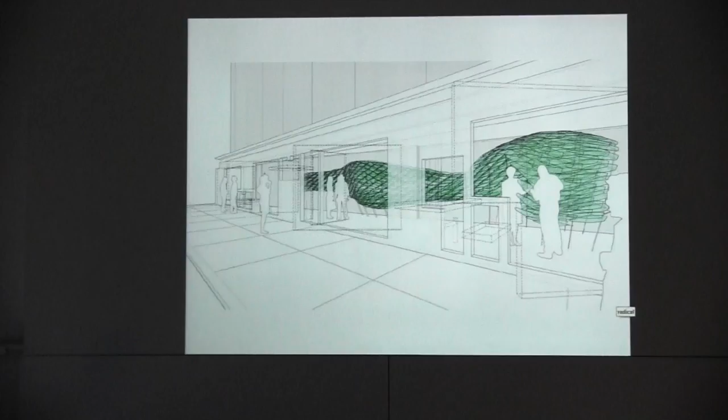Just to talk a little bit about what my office normally does, there's a very contemporary interest in just trying to figure out what technology means for form, through installations, through public art projects, and then through much larger projects at the scale of landscape or regional infrastructure. And maybe to jump into a quick project, this one was not the first project that I worked on dealing with ceramics, but I think one that was meant to be the most responsive to architecture. So I'd like to start off with that one first.

My office is located in downtown Los Angeles, and there's an incredible tradition of turn of the century glazed terracotta tile buildings all over town. Mitch had mentioned that one of the main former competitors around the turn of the century with Boston Valley Terracotta was located in Sacramento, California. That is Gladding McBean. Most of these would be Gladding McBean projects, where they basically produced all of these tiles. First of all, I was interested in trying to figure out this technique, which is press molding, which I assume is also what the majority of Boston Valley Terracotta was engaged in the past. I know that's not necessarily the case anymore. But a lot of these terracotta tile facades were done through press molding.

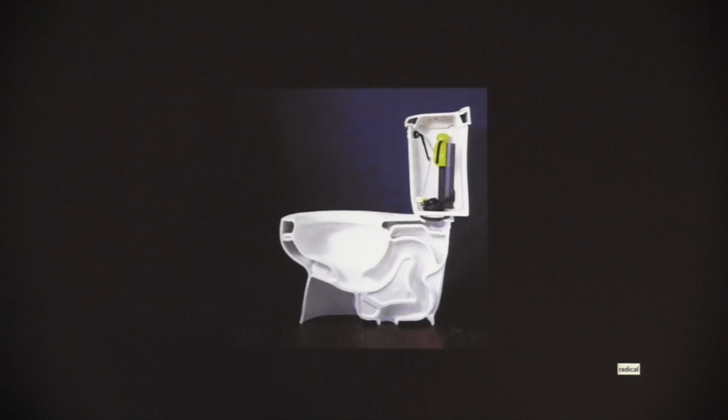This project was mostly interested in taking a look at that terracotta tile facade, which was mostly done through press molding, which we could call something which is about 2.5 dimensions. It's not quite three-dimensional, it's a deformed surface. What would happen if we produced that through a different technique, which would be slip casting, which produces closed volumes, more or less? And then what could emerge out of that? And I think we know that slip casting, which is the way toilets are still more or less produced, that number one, they operate as rather complex vessels.

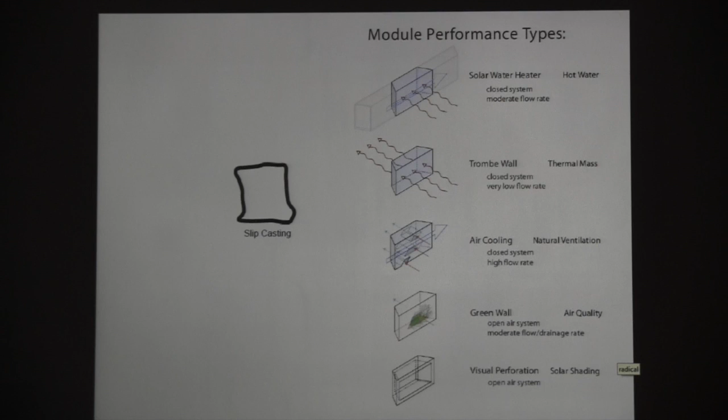So what would that offer as a facade that could be produced out of a series of complex vessels instead of a series of essentially deformed surfaces? How does that move it away from being purely ornamental into something that's ornamental and performative simultaneously? And so this is a kind of host of different types of performances that we could potentially expect out of something that is volumetric and modular.

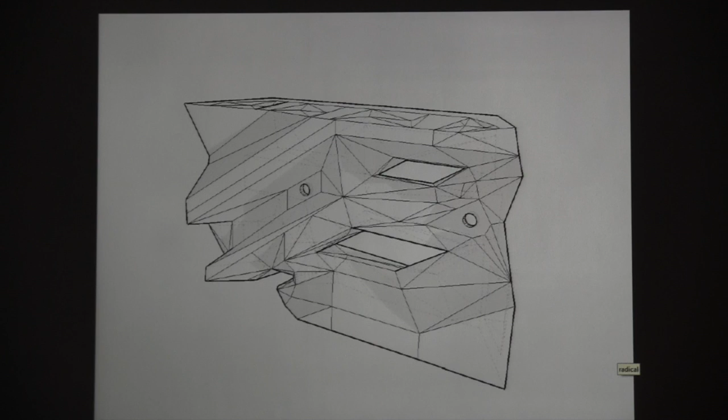And then these are the two here, the passive air cooling system and the green wall system that we then prototyped. And this module was largely designed basically about the flow of fluid between this module and neighboring modules, and then some overall pattern that would hopefully dissipate or remove the kind of browbeating logic of one module over and over and over again. I think that's also a contemporary concern with facade systems in general right now.

I think we decided to basically pick a method which was not incredibly complex geometrically, so corbelling, something which deals with courses rather than complex tiling, which would be where you're trying to produce complex curvature over tiles that fit snugly one against the other. We opted out of that and instead chose an older technique, it's like slicing things into two-dimensional profiles. If you can get one course of these modules to run along a curve, you can just stack those curves.

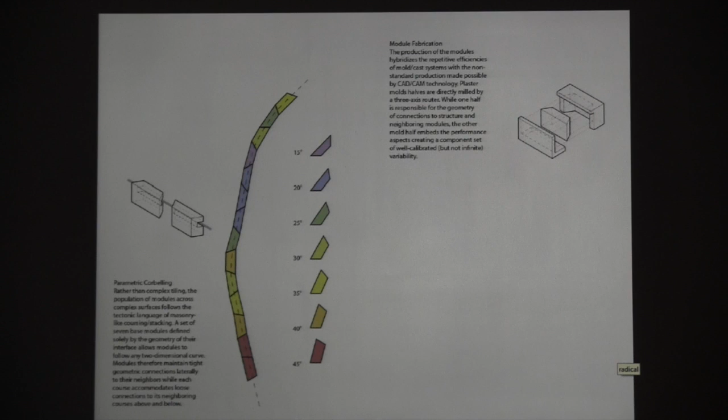And then maybe what was a little bit more innovative about this was to say we could have variable molds where we rotated out different mold halves. One half of which would be responsible for geometry, how it interfaces with its neighbor, and the other half which would be responsible for performance, what it does, whether it's passive cooling or something else.

And then again, that overall aesthetic of trying to eliminate the logic of just one module repeated, but actually being more concerned with how the population of different performances of any one of these modules would start to develop an aesthetic for the overall project. So here, a set of different types of performance, let's say for gray water filtration. I think Brian mentioned the project, which I know through Potters for Peace, which is about purifying water.

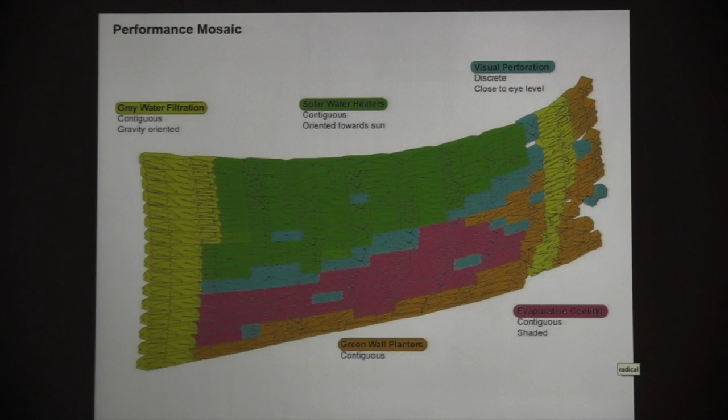That would need to be continuous vertically if it were going to be run through gravity, whereas there's some others which would not necessarily need to be contiguous. Some which would want to be located closer to the top of this kind of belly so that they'd be facing the sun, some closer to the bottom if they were looking at passive cooling. And then what any of those would start to imply for aesthetics, for the luster, basically whether or not it's glazed, whether or not it's reflective.

Any of the ones closer to the top, which are more about passive heating systems, are asking to absorb more sunlight. Those darker ones in the middle are actually non-glazed because they're meant to be left porous, since those are about porosity allowing water to filter through them. And then how color might also align with that. Some which are just the natural color of the clay body, and others which could be glazed darker to actually absorb more sunlight.

And then producing a limited run of prototypes to just test how these things would aggregate without dealing with anything like connections at this point, which would be a serious issue, but maybe anticipating them. So you can see that these all have bolt holes, and they're ready to be attached. Structure is anticipated inside of here, but this is not a structural system on its own as a ceramic system. We just admit that maybe what we're more interested in is creating a hybrid system with something like steel or aluminum profiles which deal with structure. And then the ceramic modules are left free to do something else outside of structure.

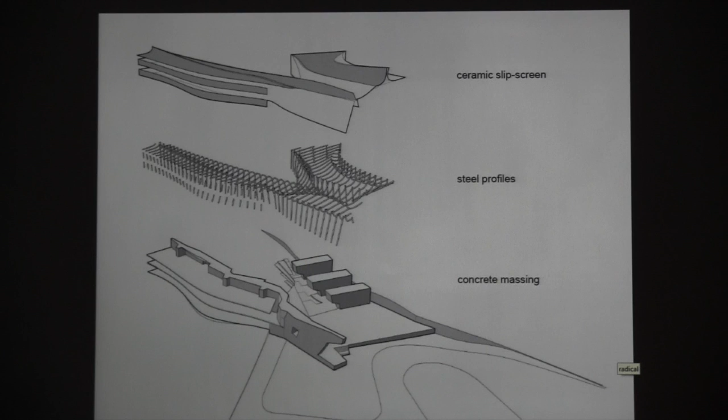And then basically saying, again, we've got this system of steel profiles, and the ceramic screen then gets to drape over the architecture, operating almost purely as a modulator of the environment. And it's barely there. It's a relatively thin profile, so you can barely see the envelope of the entire building, but maybe similar to some of the examples that Miguel showed, there's definitely a loose fit in terms of the program spaces versus the envelope.

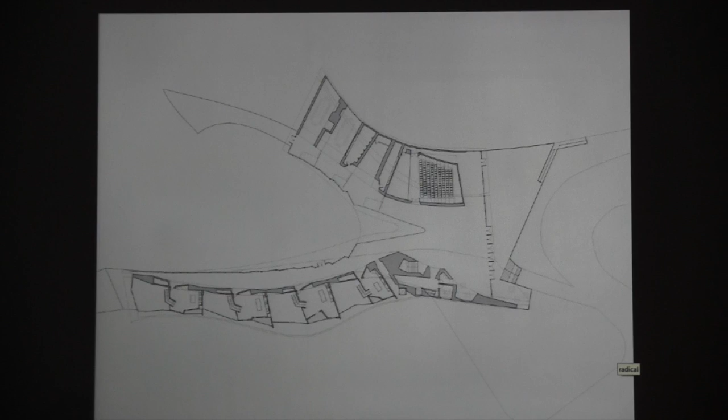And then also just thinking about the ways that both the ceramic modules and larger systems would work through the architecture, I think, was important at every step. So you can kind of see basically the passive cooling system versus something that's more about solar heat gain, depending on the time of the year, of course. So kind of a limited set of tests about aesthetics, but I think it was

more about how could we produce a larger architecture given all of these, I'm going to say advances, but it's maybe more like rediscoveries in terms of the way that ceramics can be used right now. And so I'm going to categorize that as almost updating the traditional. It's not entirely true, but then I'm going to contrast that a little bit against some other issues. But maybe in terms of updating the traditional, this is what we understand to be important inside of ceramics, ceramics performance.

And these are some of the issues that Omar listed right from the get-go in terms of what the conference is trying to tackle. Issues of availability, porosity, sustainability, all of these things that we know are inherent in the material that I think are important for us to deal with and explore regularly. And then there is another way that I think is also worth exploring, which I'm going to call testing the technological, or maybe almost more like teasing the technological.

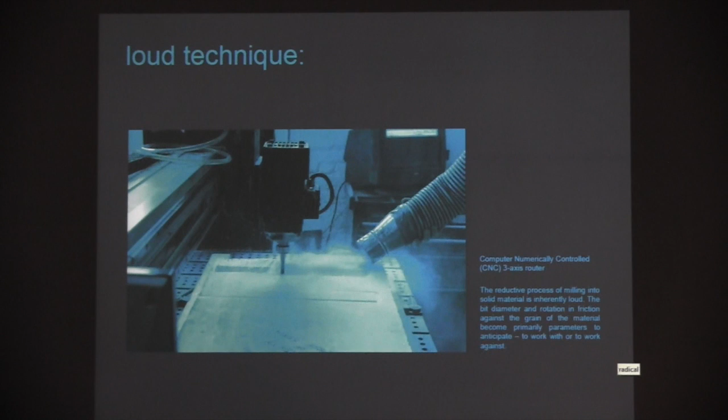And I think this desire came from me, quote unquote, growing up in a digital education. So all of my studies were paperless. There was no such thing as an interest in materiality. That was simply a function of the era in which I went to school. And I think I understood that as I came out of that, the most important thing to do was to test that against its evil twin, let's say. So I was looking for materials that would resist in the most dogged way possible. So that's what drew me to ceramics.

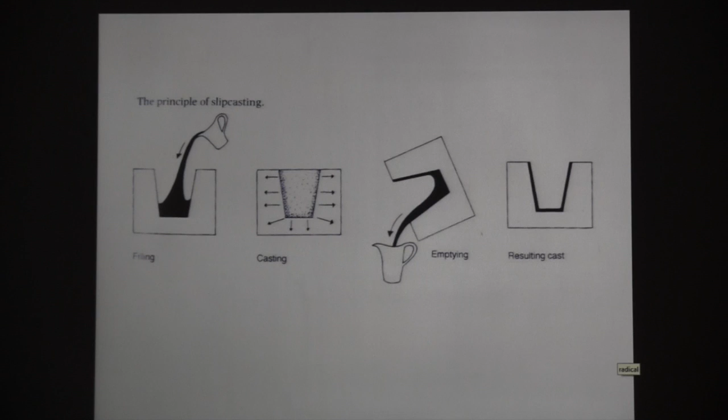So potentially everybody here already knows the process of slip casting, but essentially you pour liquid clay or slip into a plaster mold, which wicks away the water. It leaves a thick buildup. You pour out the excess, and then you let that thick buildup sit. It hardens. You fire it like anything else, and you have a pot. I love that it has this association with almost like trinkets. So my grandmother actually had a kiln and would produce pieces like this, right? Or let's say with this as the goal, maybe not of this quality.

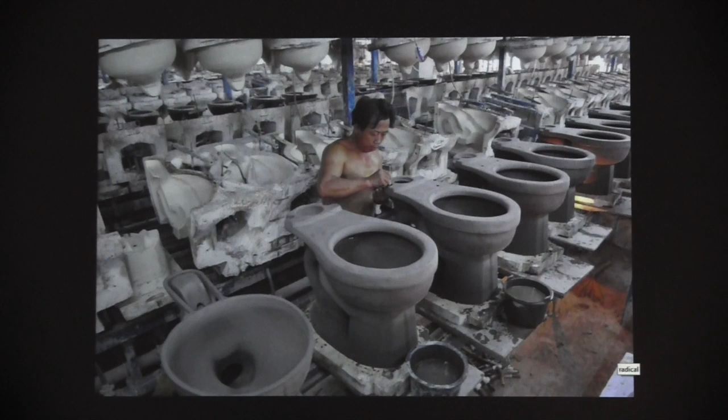And so the persistence of tradition, of this democratic availability of material, I think is important for us to reconcile with. And I would say this is something that, as architects, we somehow go through phases of ignoring. We're coming out of a phase that was ignoring that for a while. Even this persistence of tradition, that a lot of industries are still producing essentially huge quantities of products, of commodities, through a system that is more than 100, 200, 300 years old.

So the kind of anachronism, I think, is important, but there's still something valuable, actually, about anachronism. So, basically, to go back to that project of just producing this thing out of ceramics, obviously, once you get that thing out of the mold and get it out of the kiln, you have it as a fired object, it takes on a preciousness that it never had before. It takes on a seriousness as form that it never had before.

And then for me, I was also really interested in what I could discover out of that artifact that I wouldn't have anticipated had it not been produced out of ceramics. And to almost understand that again as an architect. So to just produce documentation of it through architectural techniques. And then maybe to flip to the other side and say, what happens if we just looked at it in terms of dishware techniques, ceramic traditions of dishware.

As soon as it gets decaled, it automatically locks it back into its own scale. And so then it kind of begs to be inhabited at that scale. And somehow, I don't know why, but packaging and Japanese food go together really well.

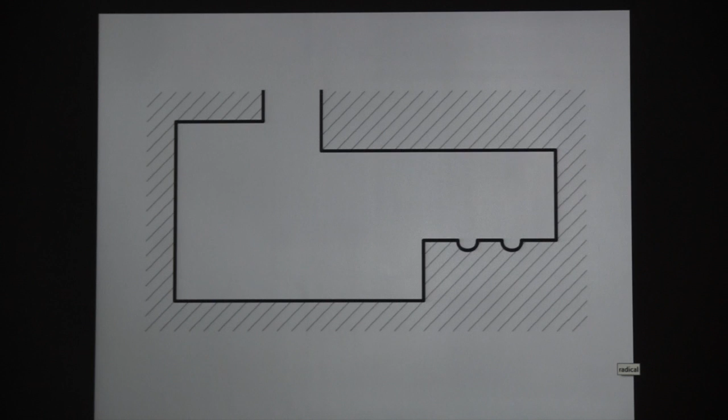So we're at a moment where we're finally coming out of that, and I think it's very exciting, which is also why we're interested in ceramics right now. The limitations of geometry over materiality, that somehow materiality still has its weight. This is a cross-section of the plaster mold, and however much you can dictate that interface zone between the clay and the plaster, there's always this interior that is produced more through issues of viscosity, surface tension, and less through geometry as dictated by me, the designer.

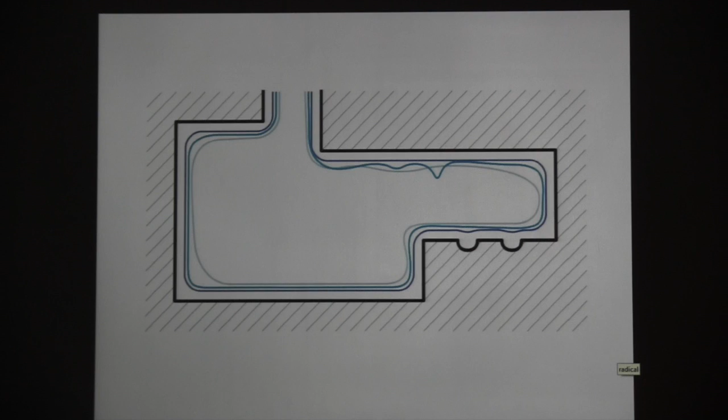And then also the complexity of all of these different mold parts that are required to produce the human form. So at certain points, that's maybe 10 or 12 mold parts that you would need because of all these different undercuts. But at other points, it could get up to somewhere in the range of 200, 300 different mold parts. And to view that maybe as something that's not a problem, but again, it's a provocation from the process to us as architects, which segues directly into one of the questions from the earlier panel discussion. What does this mean when we move to larger scales as architects? And I think this issue of upscaling is incredibly important.

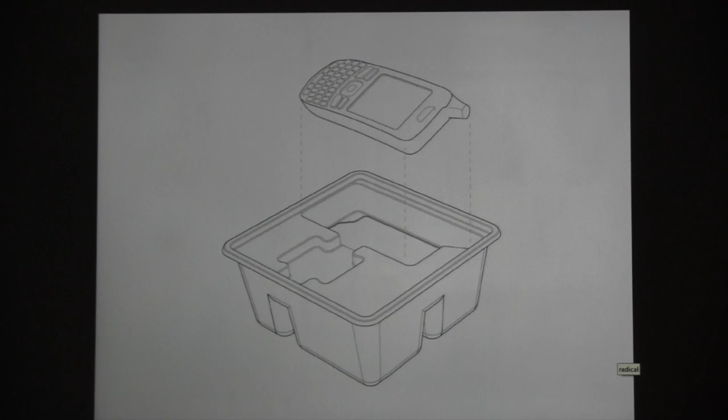So that was the next phase of this project, to just take that on. What would it take to produce that exact same thing at twice the scale? Number one, it required slicing it up into 8 slices. And then producing these different slice molds, which were 2 parts each, so it produces a 16-part mold, which already is getting pretty complex. But then I decided once I had these 16 parts that I would like to have them be repositionable. So there's 16 parts which can shuffle, which means that the precision level has to go up almost infinitely.

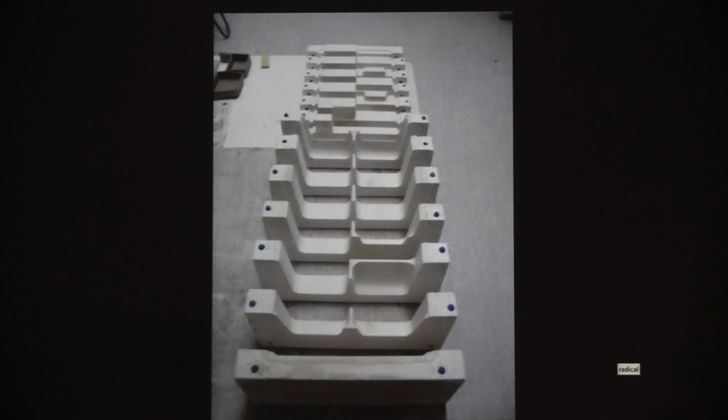This, by the way, was also done at the European Ceramic Work Center. You'll probably hear that come up as one of the hubs of advancement around the world right now. So there's that one in Den Bosch. There's Buffalo growing.

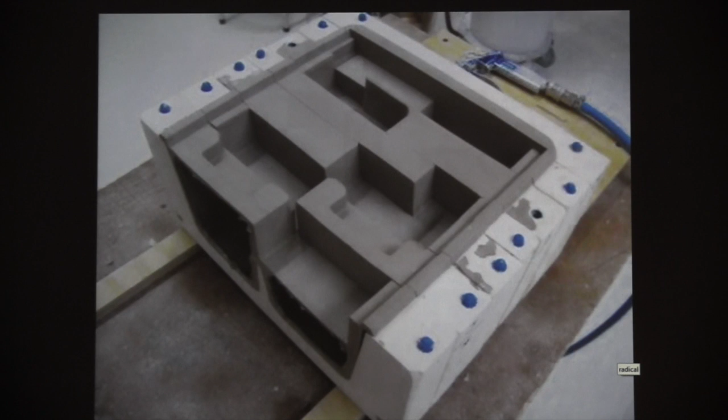But I think, what happens then when the technique starts to offer the possibility of not just reproduction of form, but actually form generation? It produces new forms that didn't exist before and probably wouldn't have been conceived of by me from the get-go. So it produces families of forms rather than just forms.

And then something that's particularly interesting for me is the way that this starts to look more like architecture, simply because it's just been doubled once. It went from about this big to about this big, but it starts to have all of these other issues there, like seam lines, ledges, all these things that get closer to architecture.

I'm gonna stop. Yeah. Okay. Thanks, guys.

So my presentation is based around the Kachel unit. It's called the Kachel unit, but I'll show how this very specific thing actually relates to a lot of these more general ideas that have been coming up in many presentations. The Kachel sounds like a really obscure thing, but I'm going to leave it as a German term because there really is no proper English translation.

The Kachel is part of the Kachelofen, and the Kachel is a kind of 3-dimensional ceramic tile unit that's used in the Kachelofen, which is a ceramic tile heater. In German there's a differentiation between Kachel and tile, which is Fliese, so I won't call it a tile. The 3-dimensionality is really critical to it, and I think it's one of the main things that drew me to explore this with some students here at UB in a seminar last semester, which I'll show at the end.

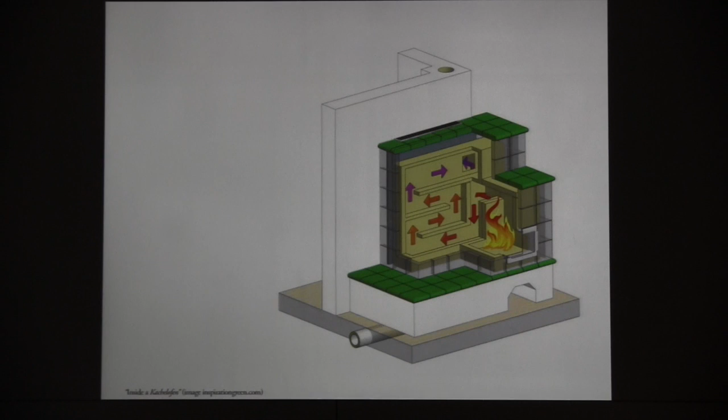So again, here's another example of just how simultaneously simple and elaborate this system is. Basically, smoke tumbles, but eventually it wants to go up. It is drawn out of buildings, wants to go up, and it's drawn out by cold air as well.

There are calculations to know really how long that flue can be before the chimney draw loses its power and the exhaust is no longer forced through. Of course, it's not a good idea to have a flue run that's so long that the smoke becomes stagnant and puffs back into the room. But that's the general principle. It's very simple.

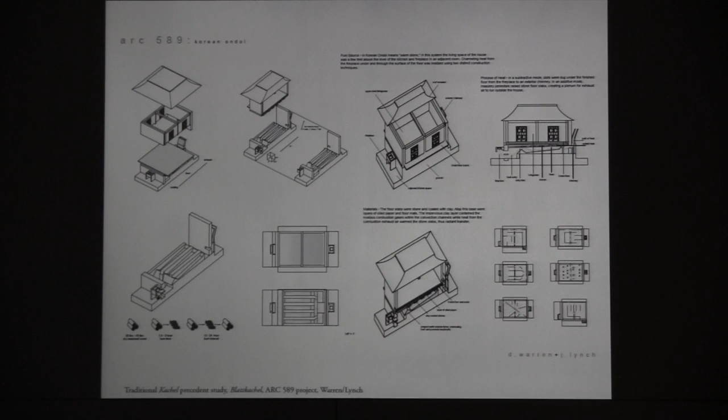And in the studies that I'll show you at the end of the presentation, this is just an example of how the students started. They looked at various precedents just to see how the system played out historically in space. So what is the impact, or what is the potential impact, or what has the impact been historically of this type of heating system on space?

With the Korean ondol, very similar to the Roman hypocaust system, there was a floor buildup with this flue run, and the floor was heated. So we think of radiant floor today as this fantastic luxury. It's actually been used in very low-tech, more primitive ways for centuries.

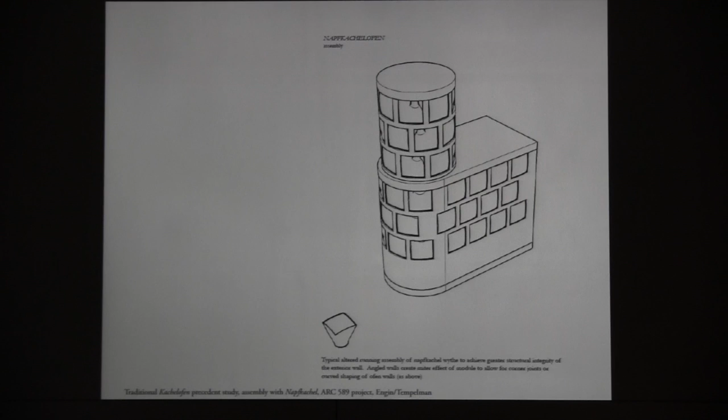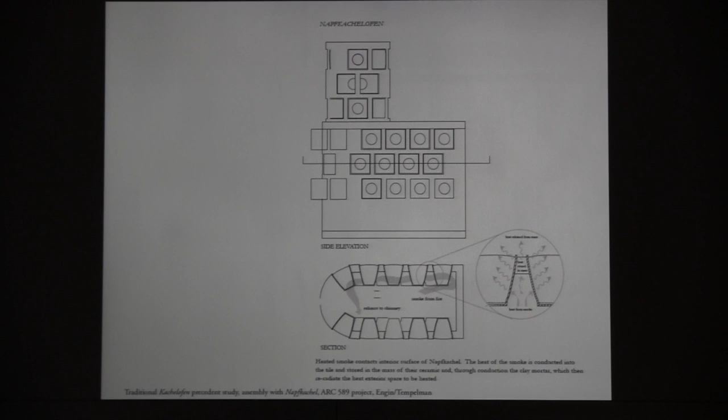So the students looked for a logic behind some of these old Kachel forms, and looked at how they figured and played a part and performed in these heating systems, how the exhaust smoke related to them, how they mediated heat. Again, more examples showing also how they were traditionally made. So again, there was a critical moment where this volume turned flat and any kind of relief became more decorative than functional.

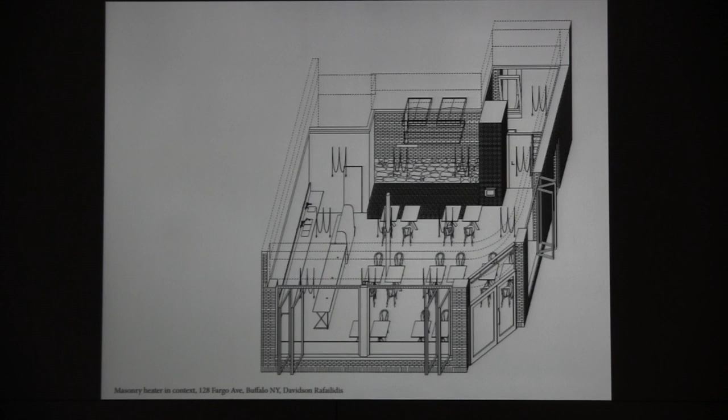Really simply articulated through a really long loop. So the firebox is here, it's insulated off of the floor so that all of the heat is forced up and out. And the smoke is drawn up through a chimney here, but first of all, there's a hole in the side of the firebox, so it's drawn through this entire bench and up. That bench is clad with a kind of refractory clay panel, precast, and that is a kind of material that becomes fired over time as this unit is actually used.

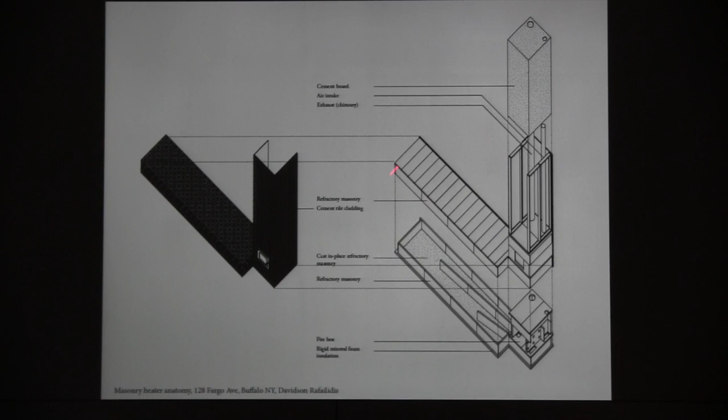And then on top of that, there's cement board just boxing in the chimney basically, and this entire bench is the sort of performative radiator really of that system. So these images show the guts or the interior of this system. You can see these boards in relation to the firebox, the construction process, how it was built up. The cladding in this case is very disappointing because it's not relating to the fundamental system. It's a cladding just like a ceramic cladding is also in contemporary Kachelofen, although this one is so big it was too expensive to use ceramic tile.

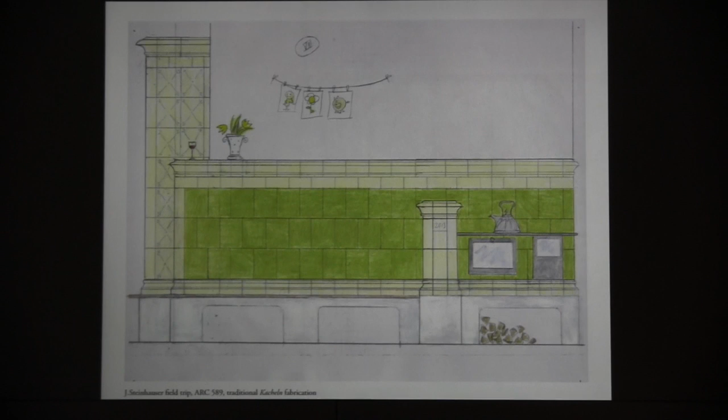So again, I mentioned Kachelofen that are made currently here in Guelph, Ontario. This one was trained in Austria and showed the students directly how these are built; it's kind of like a religion. There's a very strict orthodoxy in how these are built, the whole Kachelofen system. And the interior is completely the purview of an engineer. So that's interesting too, that they're two different systems divided by two different experts. The Kachelofen system is something that can be taken apart because it uses clay mortar, which is soluble.

The craftswoman Jessica Steinhauser gave a demo of how this little assembly could be taken apart and then put together again. Just like Joshua was describing, she uses press molding. You can see here the mold. She actually doesn't make them herself. She buys them, and they're very flat. She rolls out the clay, very traditional technique. This is really how they've been doing it for centuries, except for the extrusion machine. These were, of course, made manually before.

These are the fins that make this otherwise very flat tile three-dimensional. So these fins are critical in differentiating a tile, a Fliese, from a Kachel, because within these tile volumes, mortar or clay mortar can be packed to contribute to a higher thermal mass and adhere to the actual functional system within.

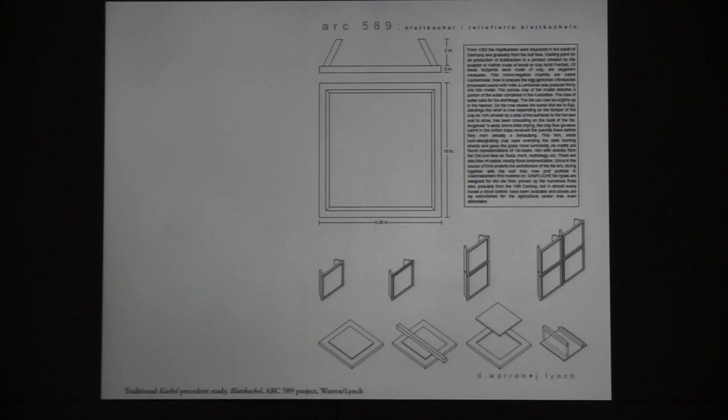They studied the Blattkachel and it really informed their design heavily. They looked at Jessica's method, and they developed a fabric formwork. In this case, it's really interesting because they didn't start with clay. They started directly in making a mold. So they made this frame and used fabric formwork, which under tension bulged in a way that they sort of pre-imagined, and ended up with variations of the bulge.

This was an interesting mold because unlike many molds, it was a mold where the pieces could be swapped out because of this mitered corner. Typically, for anyone who's worked with molds, you know that they have registration marks, and the relationship of a mold's various parts is really specific to that mold. But in this case, these were not. The mitered corner, of course, is really not stable in terms of how that mold locks together. It doesn't lock. So you can see they had a really elaborate strapping system because the weight of the slip was also very heavy.

So here's an example of a module, a 3-dimensional module made with just one bulge, the interior of the mold. This is made with pottery plaster, very simple. The slip being poured in, it was too heavy to pour out. Here you can see, it's so enjoyable to see the students start to really observe the physics of the project, and that moment where the skin is forming in slip casting and peeling away from the plaster, although it's filled with liquid slip. So as I mentioned, it was too heavy to pour out.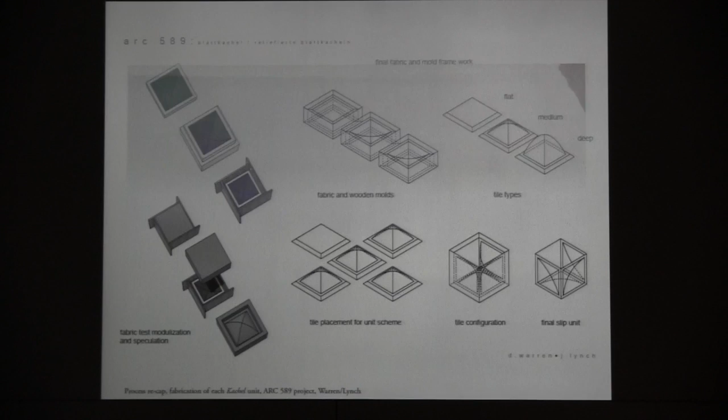The entire skin inside collapsed when they tried to pour it out, so they actually had to scoop it out with bigger bowls and then smaller bowls. So there it is hollow, releasing it from the mold, and here's a piece of greenware not yet fired of just one of the modules, views from various sides. I'll just flick through it very quickly. So these were first attempts, so they're full of questions and challenges.

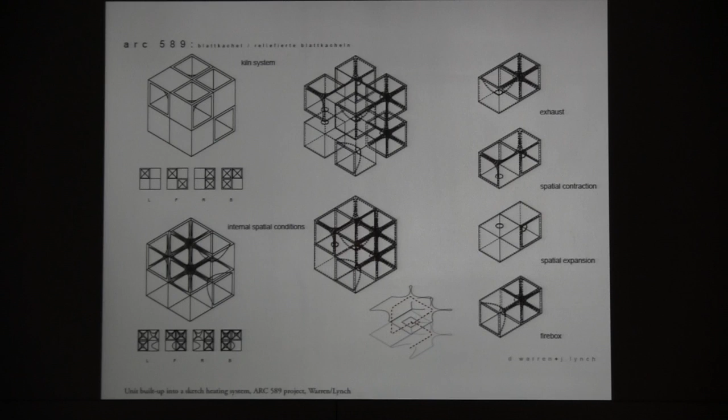So just very quickly, their logic and drawings for the fabrication. Because of the scale of these units, they didn't make a build-up, but the other students built up 4 courses around a firebox. So here is their explanation of the assembly, and in their case, one of these they presented as housing even the firebox, so this could be built up as a solid unit.

In the next case, this group of students started with the traditional technique of actually throwing and pinching the 4 corners of a Schüsselkachel into a Nachtkachel or a Rechtkachel. In terms of assembly, to try to avoid the predominance of that clay mortar, they started to just try to pile them, but moved quickly into slip casting and made, through routing and then manual sanding, a model, which was invested. And then again, these are just glimpses into the very standard slip casting method, which these students did often for the first time in this class.

So often they had many molds going at once so that they could produce enough to make an actual build-up and test their assembly ideas empirically, see if there were problems, and then adjust. In this case, they wanted to fuse some together again to try to make this variable unit where there were sometimes 2 units connected to make closed shells. So they would have to keep some parts moist and allow other parts to get dry and stiffen so they were stronger. Scoring and slipping, very conventional way of fusing.

It's done also by Jessica Steinhoff, scoring and slipping the fins onto the faces of the Blattkachel. And then these were fused to make units. And in this case, there was also a hole often here, depending on how they were drawing the exhaust.

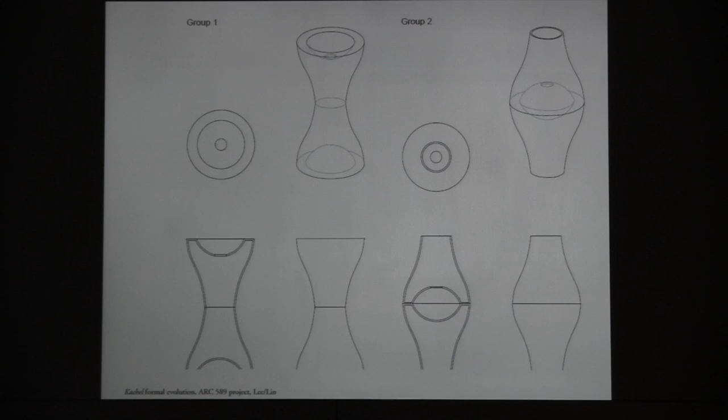So they drew this sort of variable unit showing the pockets in which the clay mortar could be packed, the assembly around the firebox, air intake and chimney, and then the final set of units.

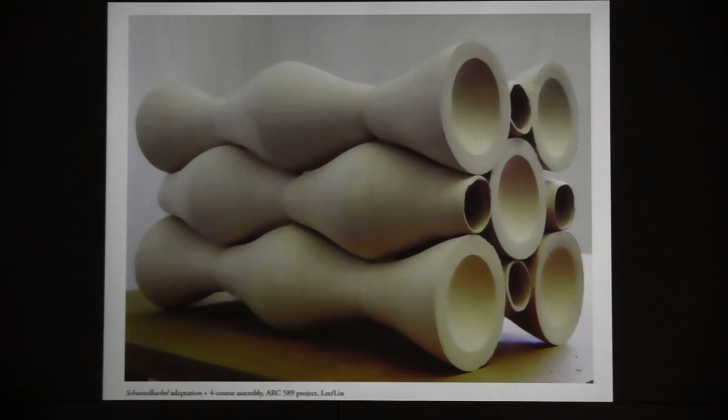My name is Peter Schmidt, and originally I was coming here with Mike Fritz, who is another sculptor at Boston Valley Terracotta, where we both work. Unfortunately, Mike is snowed in today, so I'm going to try and do a little bit of both presentations and hopefully not take twice the normal length, so we'll see how this goes.

So I currently am employed at Boston Valley Terracotta as the manager of digital design at the plant, and I got my start working with Boston Valley at University of Buffalo as a graduate student. I was placed as an intern at Boston Valley, where myself along with several other researchers from the university worked closely with craftsmen at Boston Valley to attempt to integrate digital technologies that were being studied at the university with existing craft skills that had been heavily practiced at Boston Valley.

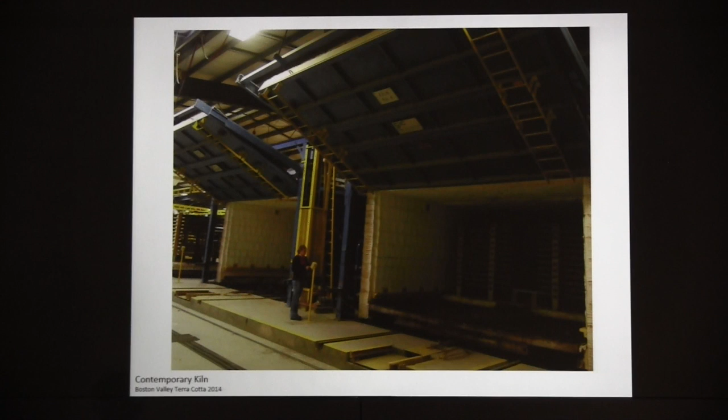So here is kind of where Boston Valley was pre the intervention of the University of Buffalo. Students and faculty from UB were able to bring several different skill sets to Boston Valley that did not previously exist there.

Boston Valley had a rich tradition of handcrafted sculpture, very detailed ornamental reproductions, but was generally lacking in digital know-how. So researchers from the university were able to bring digital modeling in the form of Rhino, ZBrush, skills which are typically developed within architecture school, along with scanning, multi-axis CNC, and several other rapid prototyping techniques that are used here at the university.

This is a photogrammetry model generated from a series of pictures. This allowed the sculptors across from Boston Valley to interact directly with a sample without having to always lug it in and place it on their table to work with it. So in this fashion, by taking a series of pictures and using photogrammetry algorithms, they can work with and interact directly with a three-dimensional model that has the same textures, colors, and forms of the shape they're trying to reproduce.

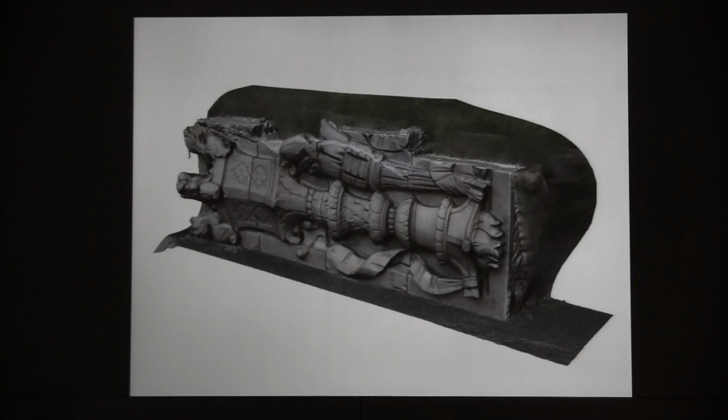This is very important because the shapes which were being reproduced almost always were damaged, hence why they needed to be fixed and reapplied to the building. So the combination of softwares allowed us to make changes, edits, and work with the models the same way a traditional sculptor would push clay around on a table. They had that same ability to move things around in a much cleaner three-dimensional modeling environment.

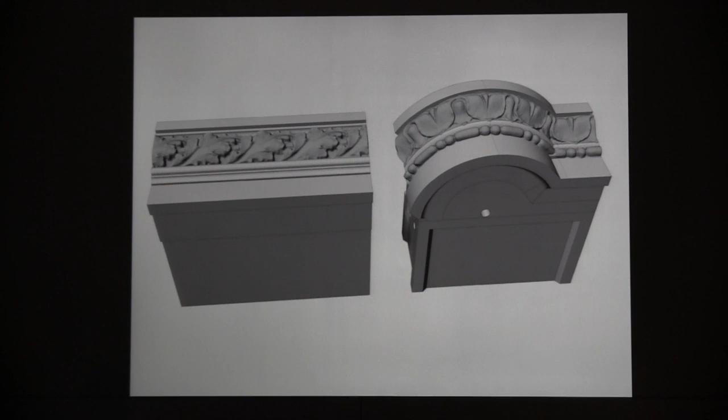And these were skills that were brought from university researchers and taught to traditional sculptors who in many cases had been working at Boston Valley using their hands for the last 10 to 15 years.

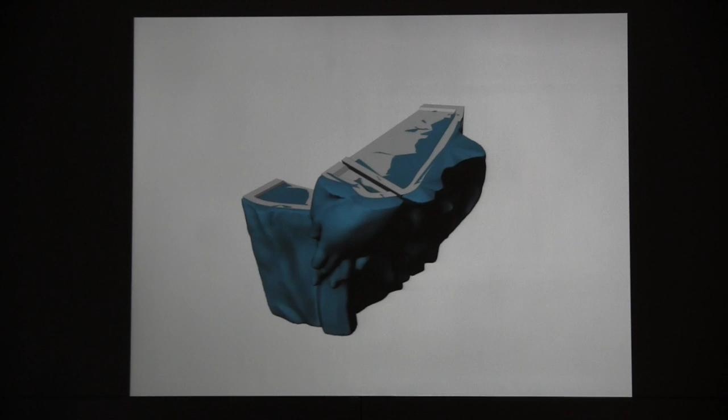So here we see an assembly starting to come together. This is the kind of hips down area of the angel as it's being filled in with different forms. So everything that is in blue here is the mesh, which was generated using photogrammetry. The darker gray on top is Rhino models that were built on top of the mesh to ensure that we have proper joints going in and everything was accurate in dimension so that it could be aligned back up at the end.

And the white are pieces, so the base piece, that all was something that we three-dimensionally scanned using structured light, and we're able to combine all of those different data acquisition techniques into one comprehensive model that allows us to get kind of the best look from various places at the statue we're attempting to document.

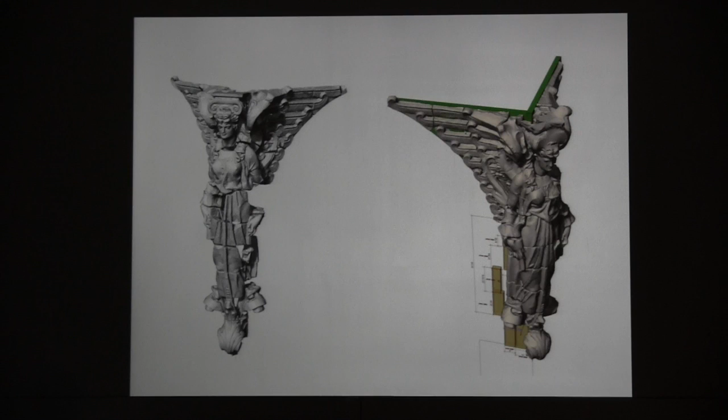So here we see the three-dimensional model starting to come together, and the final dimension sculptural piece, which in total is 25 feet high and has something like 72 unique parts in it. And all of these parts were able to be accurately cataloged and recorded thanks to the skills that both the craftsmen and UB researchers brought to the table.

The craftsmen had a deep knowledge of what they needed the software to do for them. They knew where joints had to be placed, where the mortar needed to go, where steel was going to be put through. And the UB students were able to guide them toward the proper tools to use and digital tool set that will allow them to make what they already knew how to do with their hands happen in a more digital form.

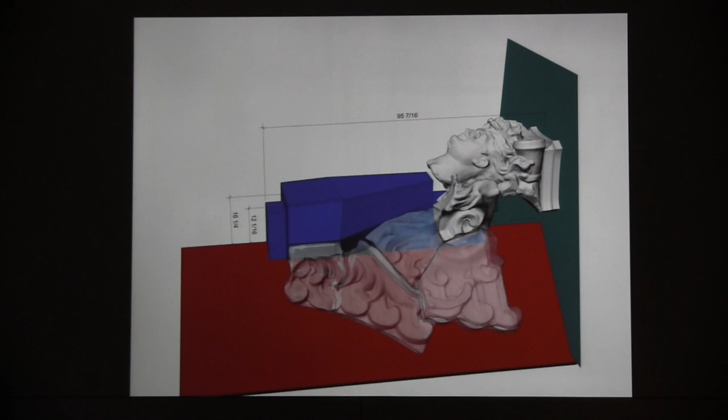So once the digital model was complete, we began segmenting it up for reproduction. So here we're taking the head and shoulders and building large plaster volumes inside of that that would act as backups to hold the parts while sculptors went and reapplied.

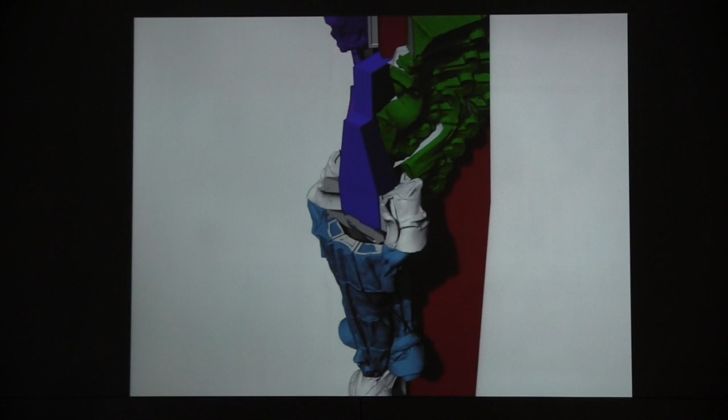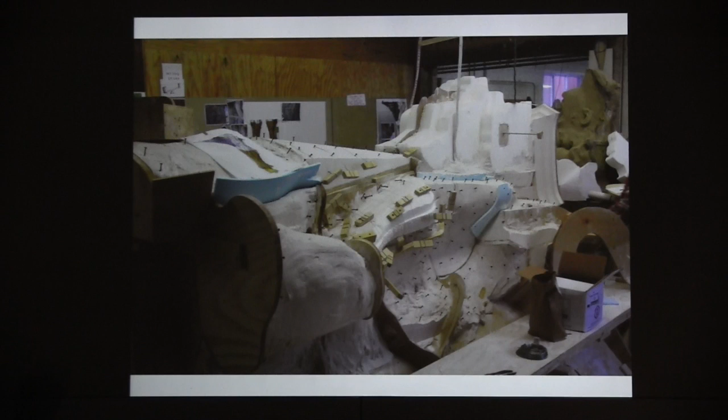So here again is the segment missing that we're looking to recreate on this table. And here are the sculptors beginning the backup modeling process. So basically they're just lumping in plaster to fill space until they have everything massed out, and from the massing stage here, they then begin to apply clay and do a fine sculpt on the more intricate details of the angel itself.

So here we see that head and shoulders area. You can see a bit of the white foam and massing on top, and the finished sculptural details more down toward the bottom area as a series of sculptors worked to recreate the forms that were previously existing.

Another thing that's important to realize is that the forms can't simply be copied due to the shrinkage of the clay. You have to model it 8% larger so that when it shrinks back down at the end of firing, it maintains the original dimensions. So all of the sculptors, you can see some of the pieces sitting next to them. They have to measure it with a 1-to-1 ruler, and then when they go and sculpt it, they have to inflate the dimensions by 8% and apply those to the model.

And here we see some of the backup and some of the wing parts as they're being taken apart. Each block is able to be removed individually thanks to the planning of the joints that we're able to do with the digital model. So as molds are being made, individual blocks are being pulled off, put onto a mold table, and a 5 to 8 part mold was made off of each piece depending on the relative complexity.

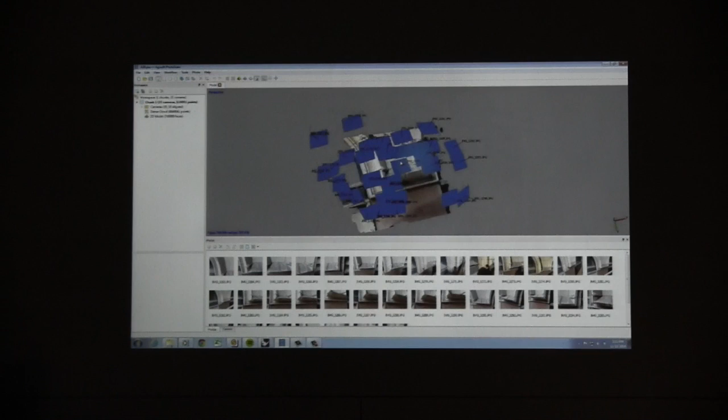We had coordinated with the contractor prior to our departure to arrange access for the areas that we were responsible for surveying. However, site conditions are never what we expect. Our tools, though, gave us an edge. Using a laser tape and photogrammetry techniques, we could reach out and collect data from places where access and time were limited.

The result was a fully interactive mesh or digital sample with amazing detail. From mortar joints to surrounding conditions to picking dimensions from the mesh, we could build models directly from site scans.

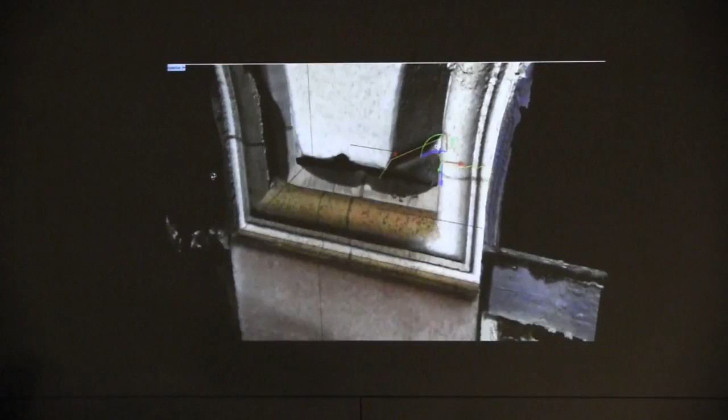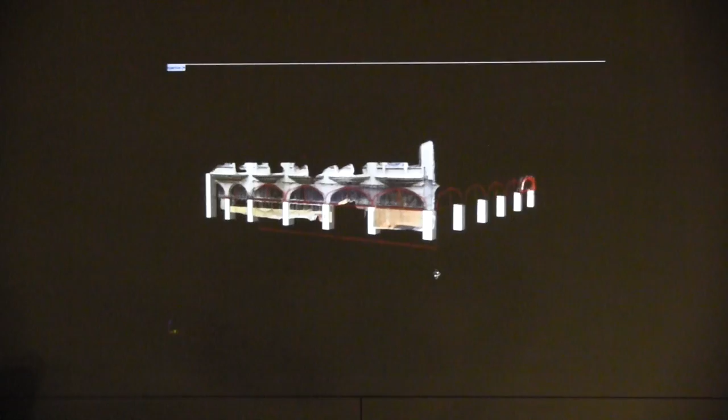And if we could achieve this for a spandrel replacement, why not think bigger? Why not an entire elevation? Digital documentation practices bring us directly back to site, even when we've left the site.

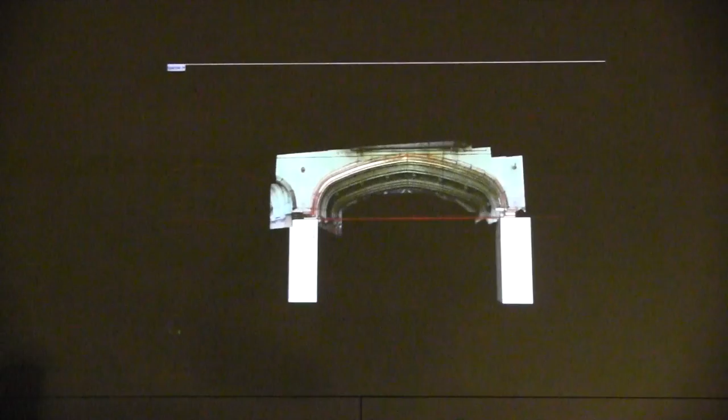The technology is changing, our tools are changing, and our craft is changing. Our relationship with historic structures is entering a new era. Not only do we intend on being a part of that era, a part of that change, but we also want to be the ones who are driving it.

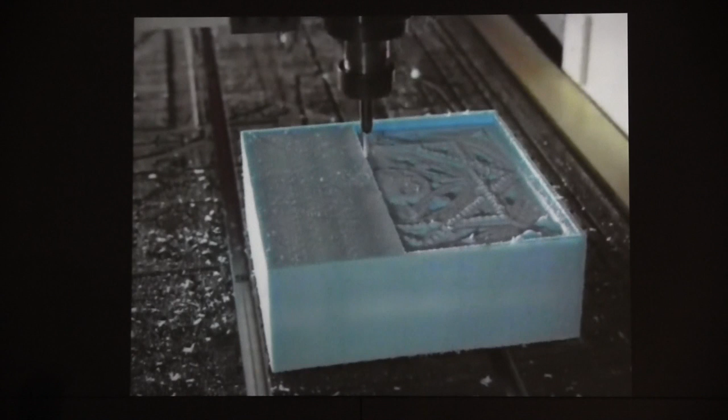A partnership with UB allowed Boston Valley to have an opportunity to test drive certain technologies, so they were able to see and experiment a little with things like CNC manufacture before fully investing in the technology. And once invested, we're able to create complex assemblies like we see here. There's column details, railings, and cornices, which the assemblies and the structure could be broken down, and once the models were built, they could be easily CNC'd.

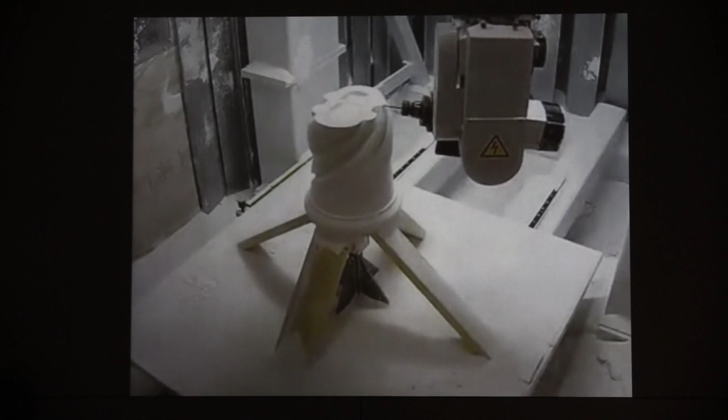So here we see the 5-axis router of Boston Valley, which is a 5 foot by 5 foot by 5 foot work envelope, and capable of quickly reproducing the information that was digitally documented in the drafting process. So here's the finished column as it's coming off the CNC machine, and it will be either A, sculpted on, or B, it can be directly molded and pressed.

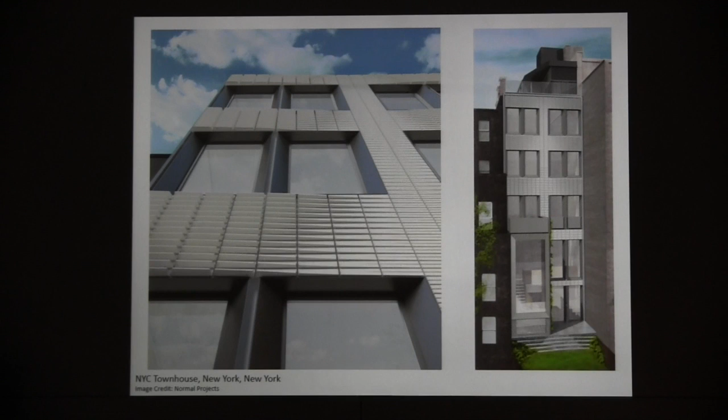So another project that I worked on with Boston Valley was the New York Townhouse, where we worked with Normal Projects, architecture firm in New York City. The goal of the project was to create a complex facade where the facade itself would give the impression of a water droplet hitting a surface and rippling out. So the architect wanted to have sloping panels which would convey that gentle gradient.

The problem with the sloping panels was it presented a very large number of unique shapes, which is typically the enemy of any industrial manufacturing process. When the architect had initially sent us a set of drawings for what he wanted, we immediately took one look at the PDFs he sent and realized that he used a Rhino model to build it.

So we asked him to send us the Rhino model, and from there we started a dialogue of collaboration between manufacturer and architects, where we were bouncing back ideas and refining the design digitally using both the design input of the architect and the traditional know-how of the industrial craftsman to attempt to get something that's manufacturable as soon as possible in the design process. So here we see the initial schematic design changing for the construction.

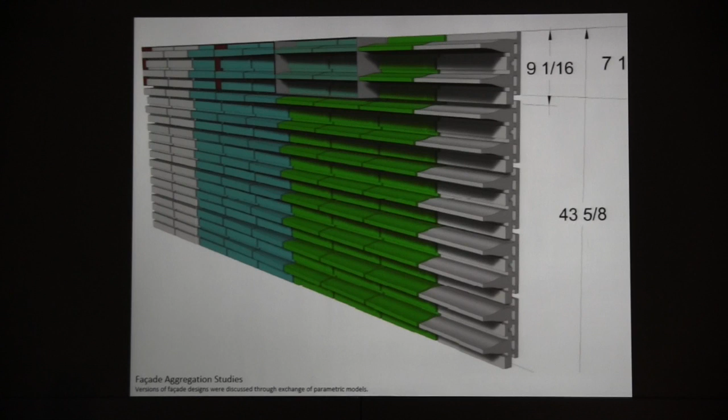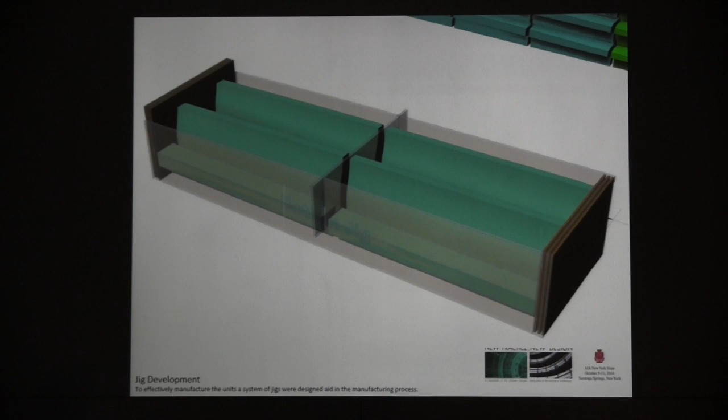Each color represents a different slope, which is put on the building to create a gradient. So the different colors are starting to break down into families of parts which can be reproduced. And this is an image of the jig, which was developed using laser cut templates to take a single shape and cut it into multiple shapes.

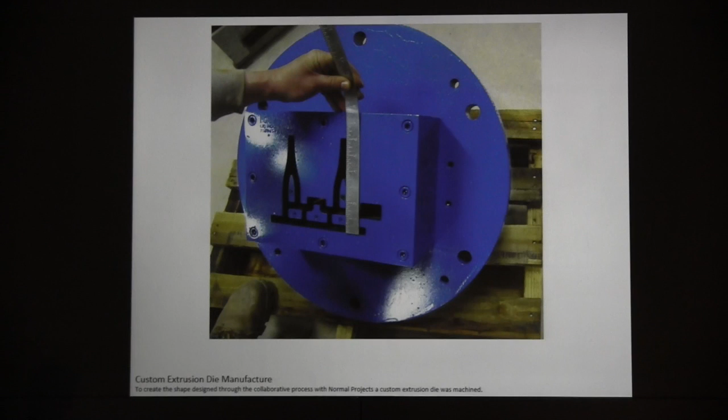And finally, a breakdown of the entire process from the custom die, which is being made, to a large run of extruded terracotta being cut into smaller workable segments, each with individual slopes to be later placed on a tracking clip system that would allow them to create one single facade that displayed a large number of unique shapes, showing the gradient pattern that was the original design intent.

So the first projects that we've looked at have all been jobs that Boston Valley Terracotta was paid to do. The last project I'm going to talk about is the opposite of that. It was my thesis project for the University of Buffalo School of Architecture.

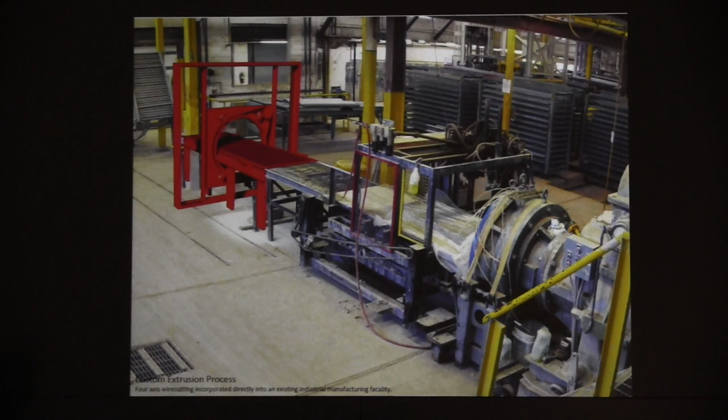Based on my work as an intern at Boston Valley, I quickly realized that architects and manufacturers needed to work closely together. The collaborations that we had previously done had demonstrated that, and it demonstrated the benefits of architects and manufacturers working closely. However, there was often a lot of, call it telephone translating that had to happen, where both sides thought they were talking about the same thing and nothing really lined up. There were lots of hand-waving, whiteboard-centric conversations trying to convey to the other side the architect's intent or the industrial manufacturer's feelings on what could actually be made.

So for my thesis, I undertook the task of trying to create a digital tool that would bridge the gap in between architecture and manufacturing. So I proposed a custom wire cutter for the process of extruded terracotta.

When talking to the craftsman at Boston Valley Terracotta about my idea of wire cutting, I was initially greeted with a lot of skepticism, and once I got past the skepticism, I was given a large number of general descriptions, which were very difficult to quantify in numbers. There were a lot of qualitative descriptions for how the terracotta feels and what happens to it, which is helpful, but not great when you're trying to design something that is computer software driven. So I needed to associate numbers with all of the variables that were qualitatively described to me. So I broke it down into a series of tests here.

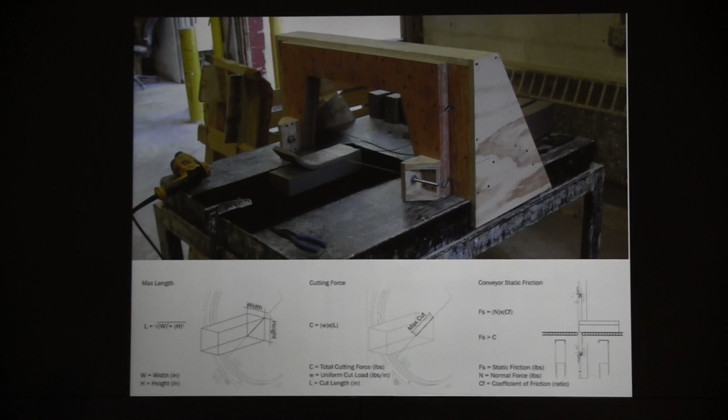We're looking at the coefficient of friction as compared to the density of terracotta that would hold the terracotta in place and allow it to be wire cut. The next variable I had to test was the force required to pull a cutting wire through a block of extruded terracotta, which is much harder than typical sculpted clay or plasticine. So the cutting force relative to the diameter of the cutting wire had to be also documented and cataloged. You can see here, this is a plywood jig that I built using a force gauge to accurately calculate the cutting forces of different moisture contents for terracotta, because as the terracotta dried, of course, the cutting properties changed, so that variable also has to be cataloged.

The next variable that I had to test was the deflection and breaking strength of the wire, because terracotta is in a very densely packed form when it's extruded, so it actually becomes an issue of the wire not being able to withstand the cutting force or deflecting too much under the force exerted by the terracotta. And in order to accurately cut, I had to program a deflection matrix that would keep track of the amount that the wire was bending at all times and compensate for that in the movement of the cutter.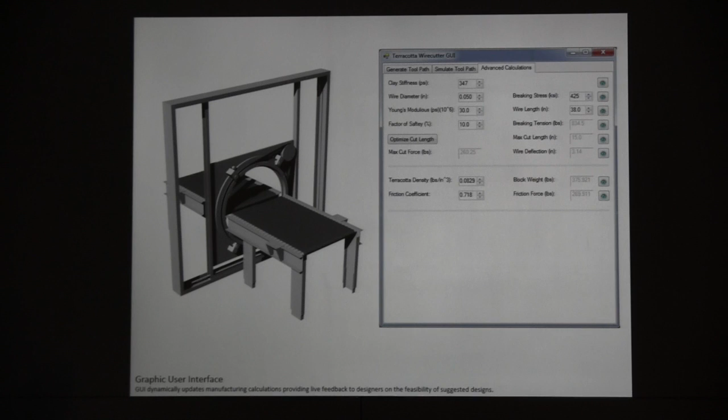Once all of the variables were cataloged, I then moved forward to create a plugin for Rhino that would expose all of the variables that I myself had documented to anyone who was attempting to design with terracotta. So an architect could simply download the plugin, and they would immediately have at their fingertips the modulus of elasticity for the average cutting wire, the strength of terracotta, what your coefficient of friction was going to be. All of the various tests could be easily seen in one graphic user interface.

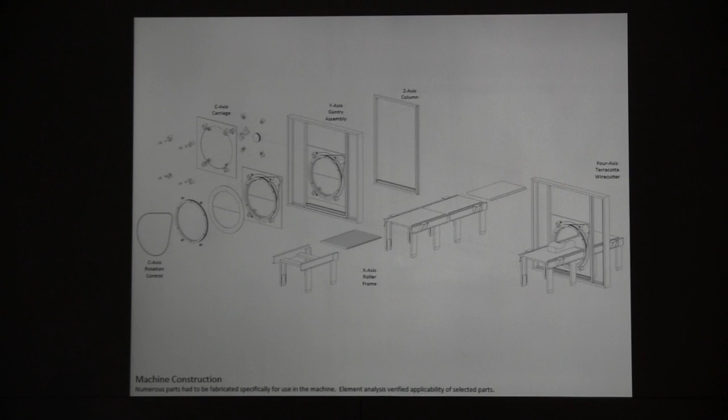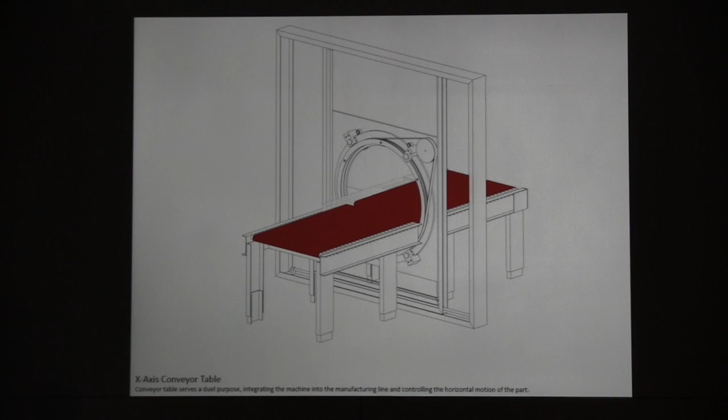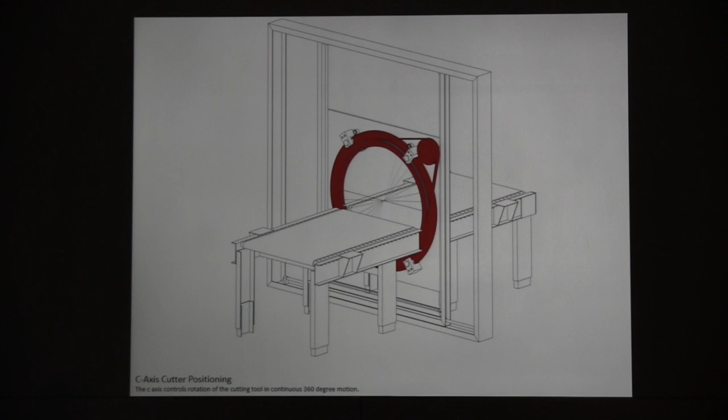Step 2 of the process was to design the actual machine to do the cutting. The machine itself is a 4-axis wire cutter and breaks down into a conveyor table, which moves the clay along horizontally to integrate within the larger scheme of the extruded terracotta workflow at Boston Valley Terracotta. And it also serves to control movement in the X direction, similar to an X gantry would in a typical router or CNC application. The Y-axis allowed the table to move left and right. The Z-axis pulled the wire up and down. And the C-axis controlled the position of the wire so that it could be rotated 360 degrees in any direction, allowing for any number of ruled surfaces to be created using the 4-axis wire cutting system.

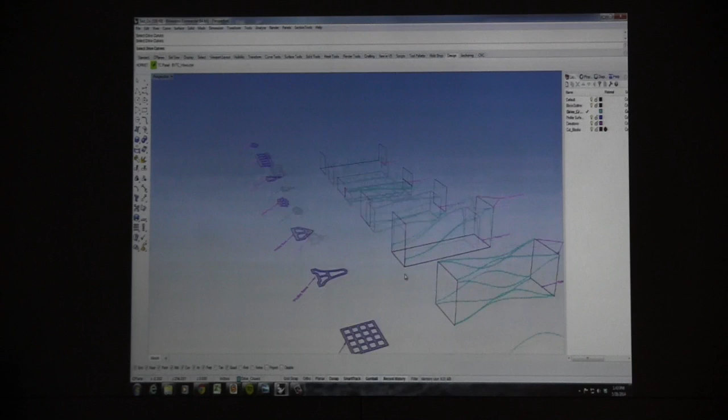So this is a little demo of the plugin that I wrote using very simple curved geometries in Rhino. You can create fairly complex forms. So here, the only inputs that have to be designed are the shape that you want the wire to take. So the blue curves that are being selected are the cutting profiles. And then the gray surface is the extruded shape. That would be the die. That would be the base for the extrusion. From there, you can generate all of the G-code that will run the machine. So that's what you see in the upper left-hand corner there.

And it also runs all of the optimization tests to ensure that the wire will actually be able to cut properly for that specific profile given the input curves and diameter of wire that's being used. So it essentially will give the designer access to all of the variables that they need to design the terracotta in a very efficient manner.

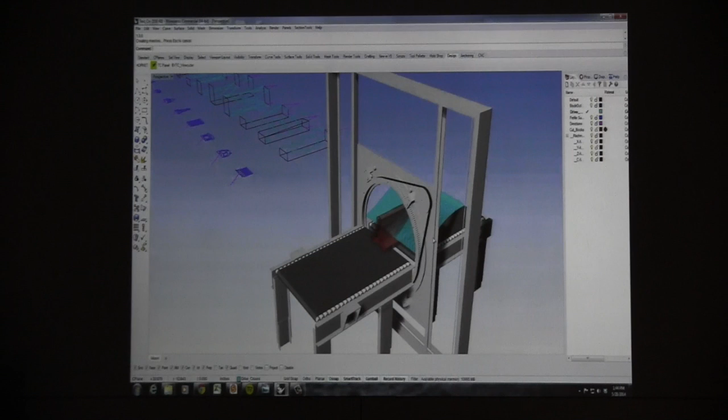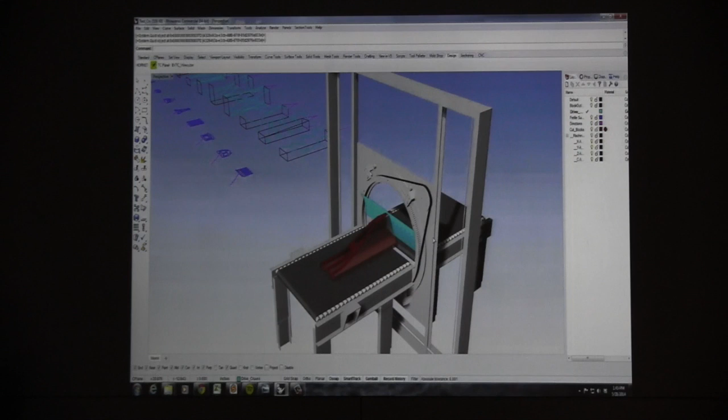So here we're seeing one of 3 tool paths being cut on the wire, and all the simulation happens real time in Rhino, so you can run it and then watch as the extrusion is fed through the wire cutter. And as each cut is made, it's subtracted out as it would be in the typical process.

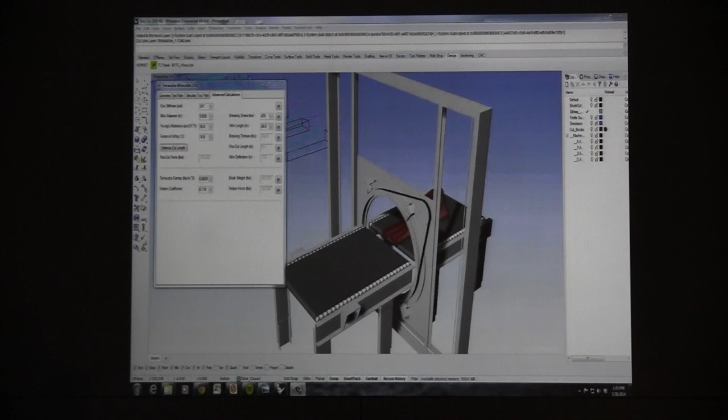So you can see the final result is a piece which has a sloping cut and 2 end segment cuts to ensure that you get the proper end length for each end. So your overall dimensions can also be cut using that. And

And here we see the gearbox and servo motor that controls the x-axis, so the motor powering the movement across the table. This motor had to be substantially larger than the other 3, which were operating the C, Z, and Y axes.

And in order to justify this purchase of a larger motor, I had to do a lot of calculation here, probably most important of which being the very bottom calculation, the force per dollars calculation, which helped me justify it to the people who are actually paying for this system.

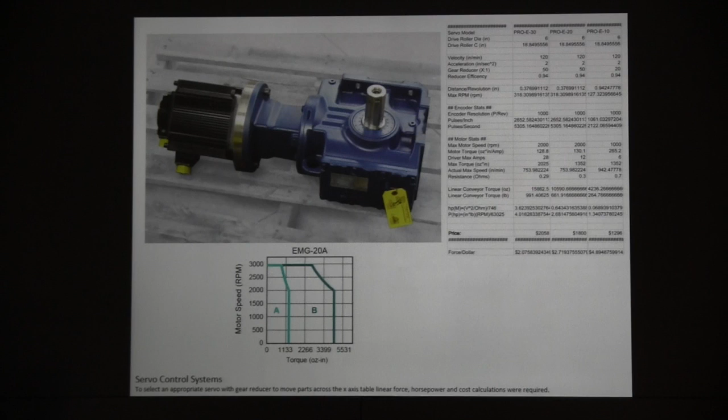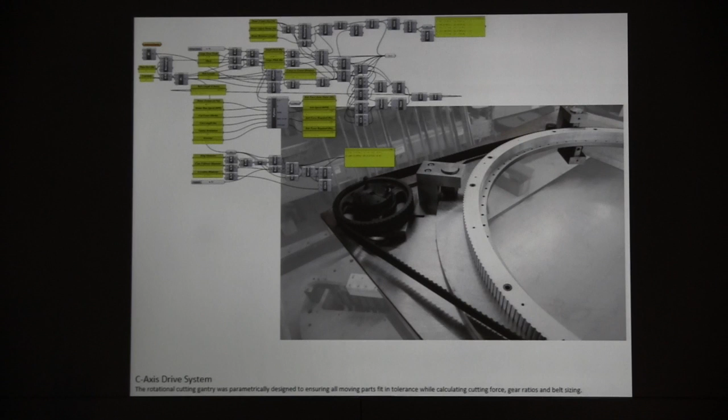And here we see the gantry, which itself was a very complex assembly of bearing blocks, gears, pulleys, and servo motors. After several times of me going through and completely redesigning the model from the ground up, because I had to change the servo size or had to scale up my bearings, I eventually made a parametric model using Grasshopper, which allowed me to place all of the parts parametrically and continually calculate the forces that are being generated as I make changes to those parts.

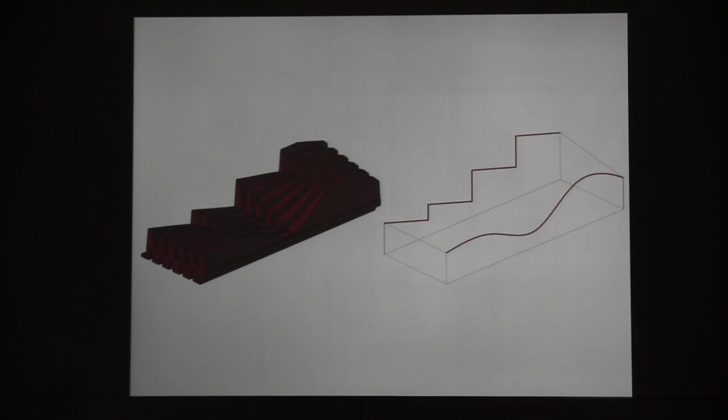Here we see a sine curve and a zigzag shape, which can be placed together on a track and clip system, which give a facade with a variable amount of depth and a certain texture to it, as well as a chamfered corner condition that can be introduced.

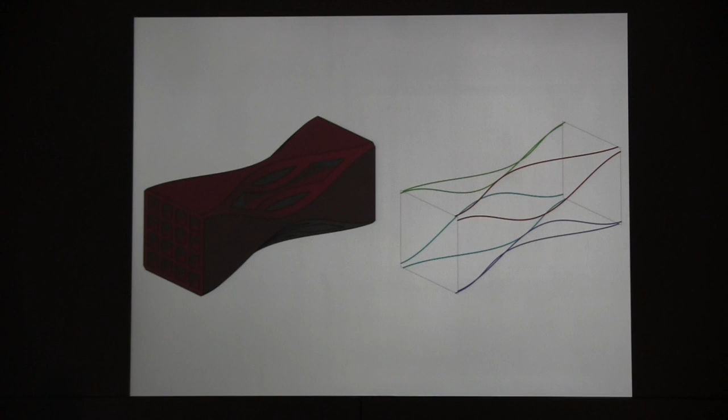And here we see multiple tool paths, so cutting all 4 sides to create various column conditions, and what you can see at the top sort of begins to resemble what would be considered a more traditional frieze that has been done before in older styles of architecture, in another little design sketch.